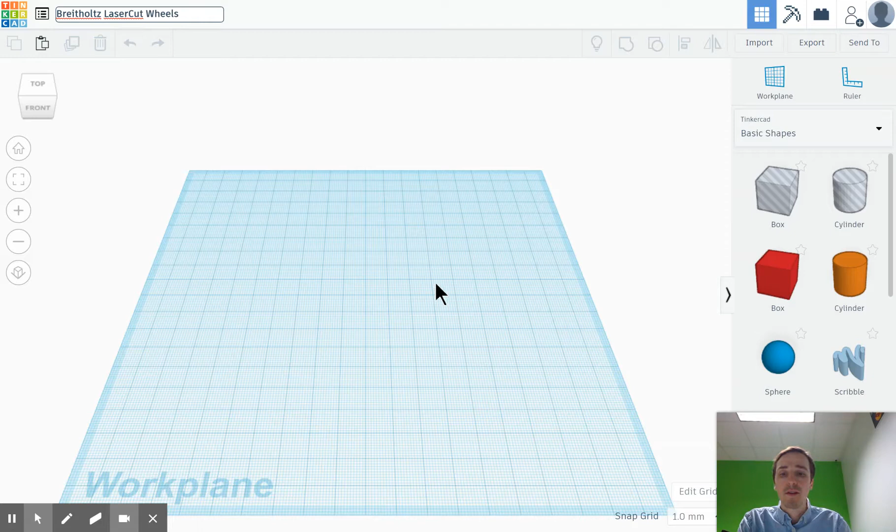Anything that you put on this blue work plane is what's going to export as an outline for laser cutting. So here's an example: if I want to make a wheel, I could just take a cylinder and make it pretty flat, because it's going to be just cutting the outline, right? So I'm not worried about how tall it is, that z-axis.

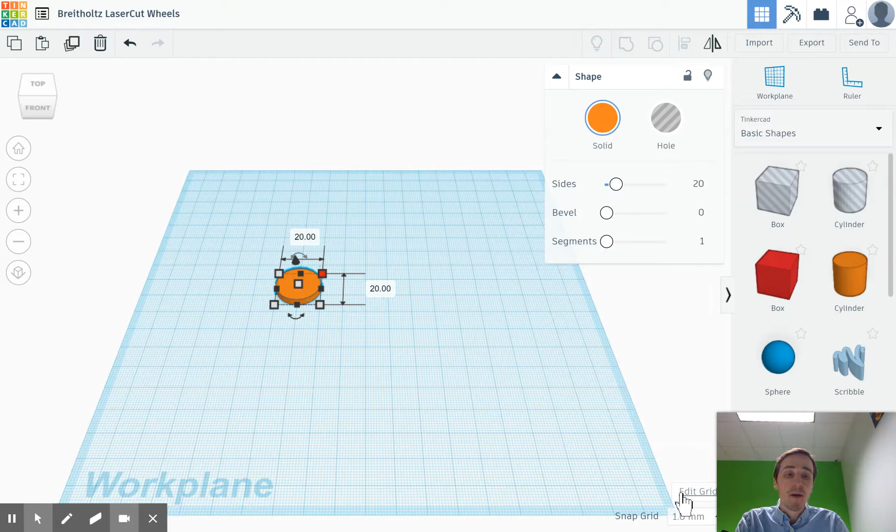The size of it is going to be dictated by these dimensions. Right now it's 20 millimeters by 20 millimeters. If I want to use standard, I can click edit and change millimeters to inches, so instead of being in metric. Now I'll see that this is less than an inch.

So I want my wheel to be a certain size. I'm going to want to measure probably with a ruler and see, do I want 2-inch wheels? So I'd go 2 by 2, and this will give me a 2-inch wheel like so.

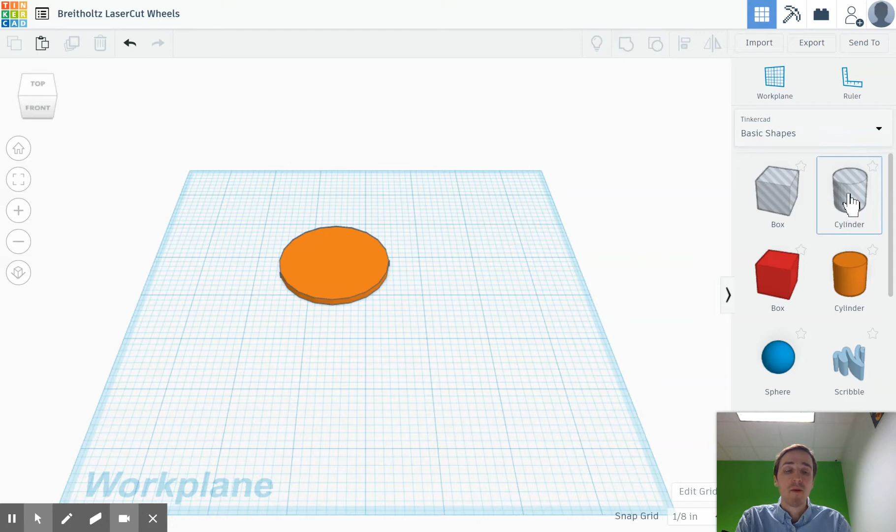Now I'm also going to want to think about, if I'm making a wheel, the axle that will go in the middle. So I can just take a shape like this. And if, say, I'm using a 1/4-inch dowel rod, I would put in 0.25, and I'm going to put this directly in the middle.

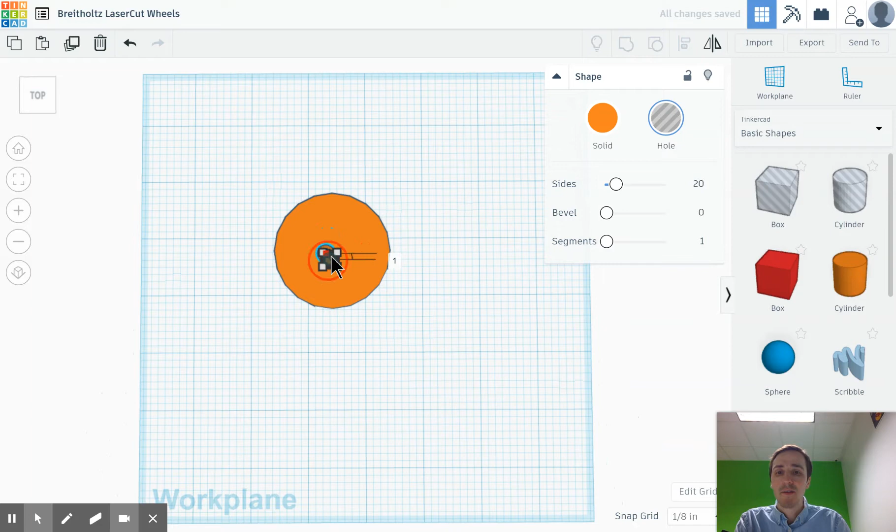Now I can hold Control on my keyboard and get this sized up. I want this to be right in the middle, so I'm going to move this thing until I get it where I want it, and zoom in a bit so I can see it.

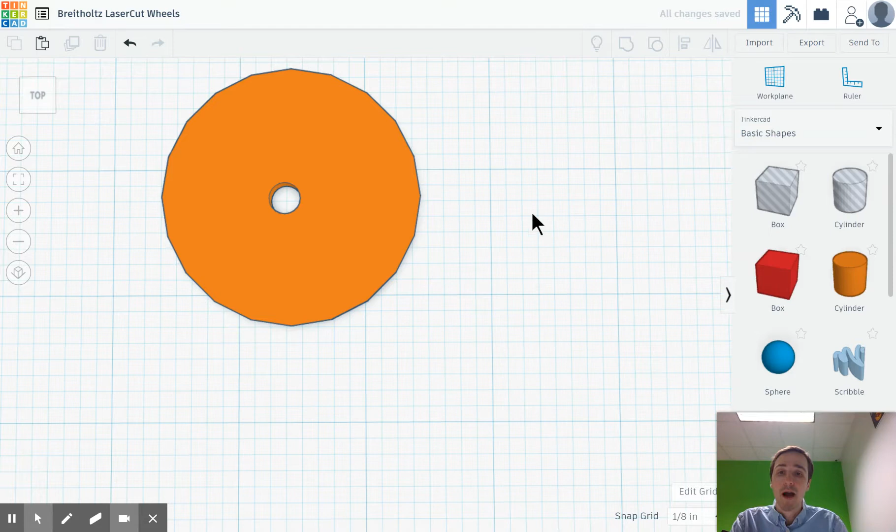Now, to make that a hole, I'm going to highlight my object and group it. And there I have a hole for my axle. So I can make a variety of shapes and objects to put on here.

So if I want, let's say within shapes, I go through and want another object, and I'm going to try using this tube for a component that I want laser cut or something else. If I drag it over here, again, whatever is touching this blue work plane is what's going to be laser cut.

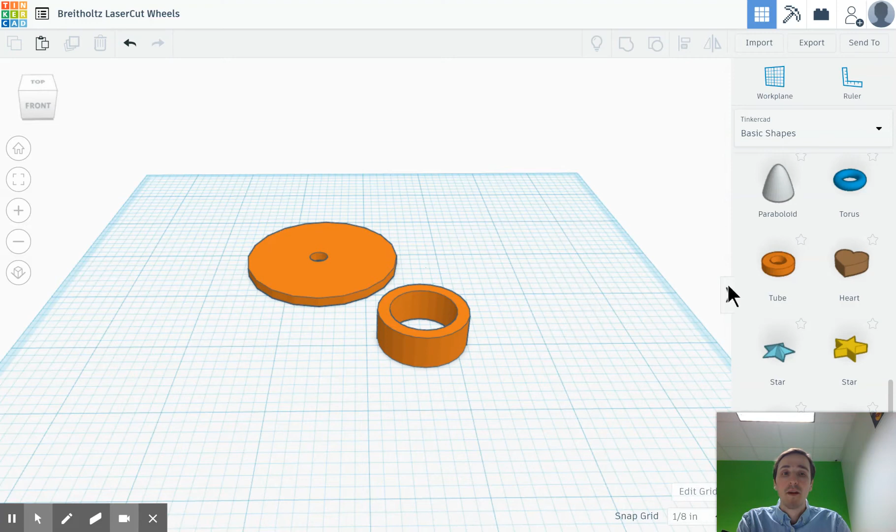So then to turn this in, after I arrange my work plane nice and even, I want these to be pretty close to each other, as close as possible without touching, because we want to maximize the materials we're using. I'm going to click export then, once I have everything done and ready.

And there's an option that says laser cutting, so I'm going to use a .svg. I'm going to do everything in my design and download it as an SVG, and save it to the appropriate place.

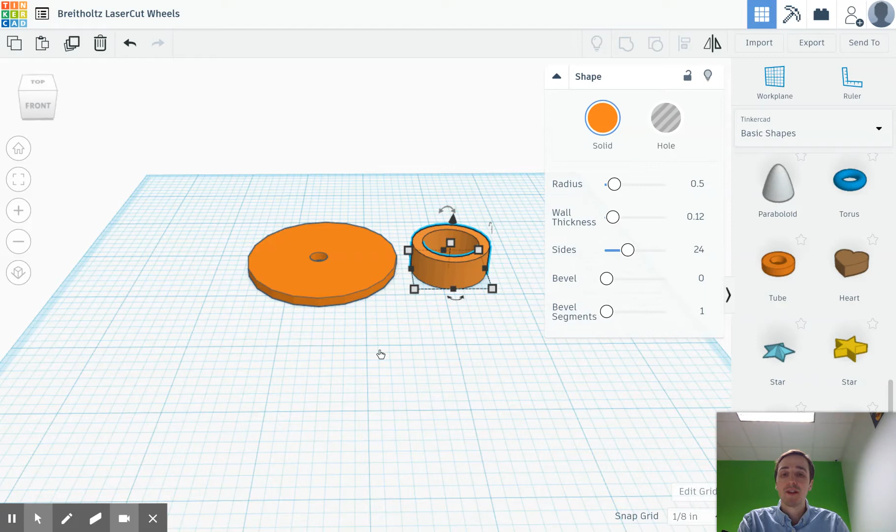On your Chromebooks, it will save into your files. If you're on one of the Windows computers, you're going to want to save it to the desktop in the appropriate folder. So I'm just going to click save. I'm saving mine to my desktop since I'm on a Windows computer.

And then what you'll end up with is an outline of the objects that you have, and you'll be able to turn that in via Google Classroom. Then I will be able to arrange it and laser cut it for you. As you get more advanced, you'll be able to laser cut it on your own, but for now, I will cut it for you. There you go, that's laser cutting in Tinkercad.